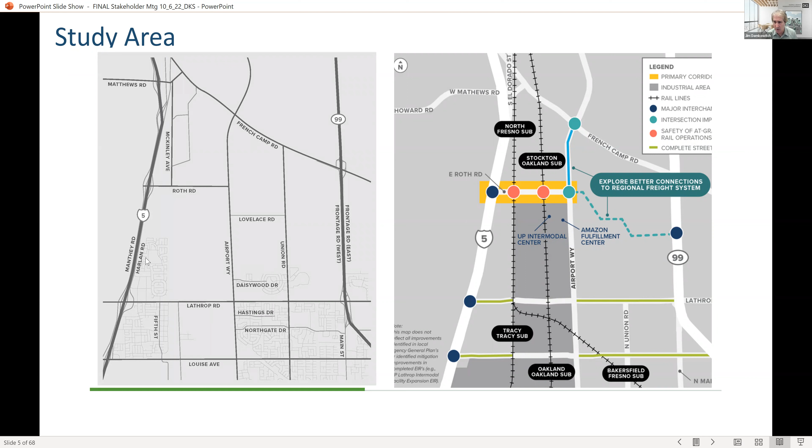That's been the big issue. And there's two at-grade rail crossings on Roth Road. That's these two red dots over here. So even though it's a somewhat simple network, it's got some challenges.

And just real quick, we did do data collection for this effort. But I do want to call out the county and the city of Lathrop and the city of Manteca. They have also been doing a lot of traffic counts, and they were happy to provide their data to us to defray the cost of us having to do new data collection.

And you can see here, and Sean will later talk about the study area intersections, but there was quite a lot of good data collected for this study.

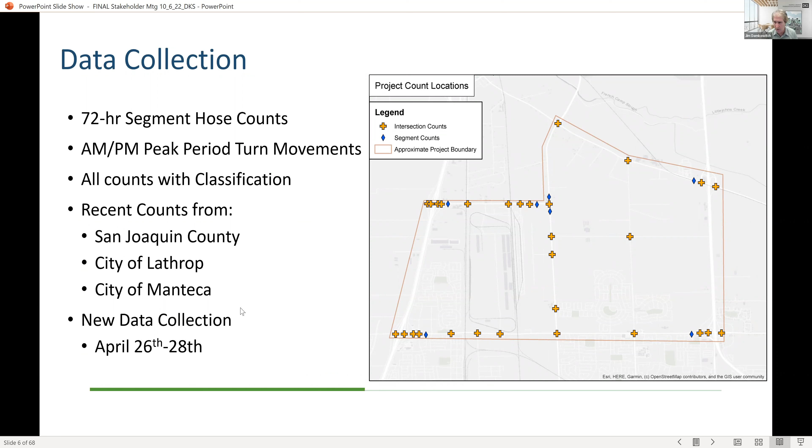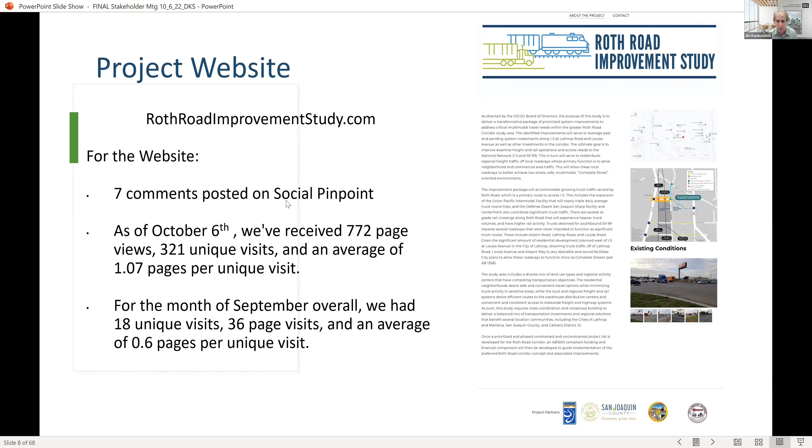So we're getting traffic. But the one thing that we didn't really get a lot of is comments on our social pinpoint site. You might be asking, if you don't know, what the heck is that? And you go onto our project website...

You'll see the social pinpoint interactive mapping tool. You can click that open and it kind of works like Google Earth. You can go to a precise geographic location and provide a geo-referenced comment. It's a great tool and it's still open.

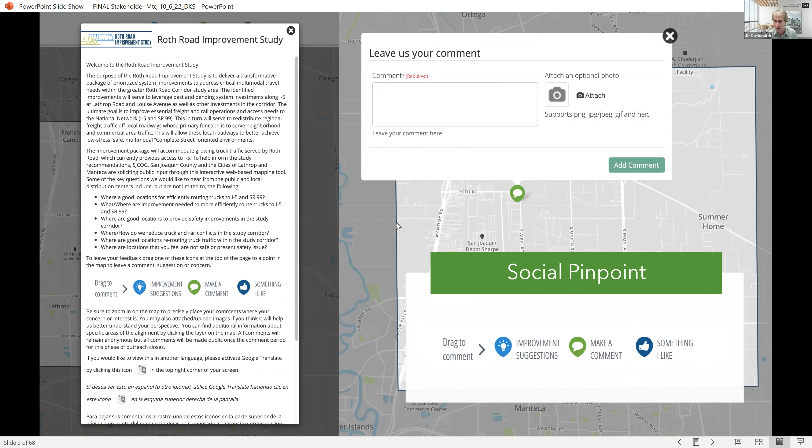So anyone can get on and provide input, whether they know a location where there's an issue or a problem, or they have an idea in mind for an improvement at a specific location. Feel free to go ahead and tell us what you think.

Okay, so obviously trucks are a big component of the traffic problem in the area. I'll have Garth of my staff discuss how we developed the truck volumes for this study. Garth, I'll pass it over to you. All right, thanks, Jim. Good afternoon, everybody.

As part of the truck trip generation, there were a few different pieces of data we used to develop that information. First, as Jim was talking about on a prior slide, we collected traffic counts that helped us gauge the classification of existing vehicles on the roadway. That was collected at a number of locations in the study area. For truck trip growth, we primarily focused on trucks that were three axle and larger.

A couple of key things we did: we reached out to stakeholders through a survey system and received data from them regarding existing traffic patterns today, their projected growth over the next 20 years, and information about seasonality of those trucks. From that information, we pulled together assumptions for background truck growth over the next 20 years. We accounted for a 25% seasonal increase in truck traffic against a typical month, and included a 50% growth over what was collected out there today.

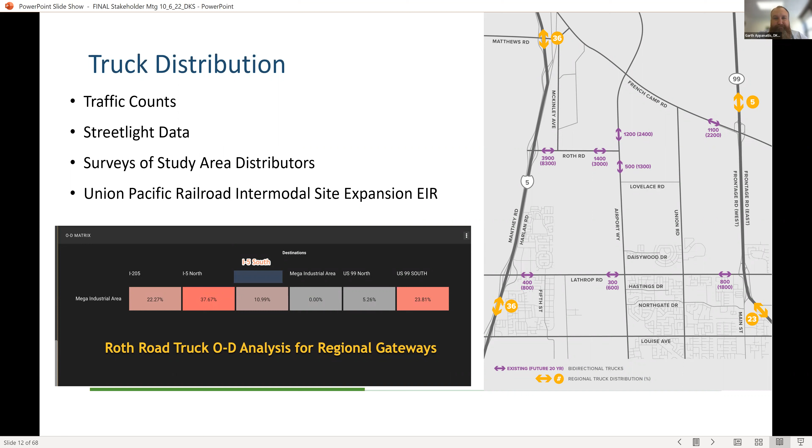One of the other pieces of information we used was origin destination data, so we were able to verify which ways those truck trips are distributing, whether they're going to and from 5 or 99, and then from the north or from the south. We used that information too when developing those volumes. Jim, back to you.

Thanks, Garth. Just so folks get a feel for this, we analyzed trucks separate from passenger vehicles because we wanted to accurately address truck growth, since trucks take up more space—their passenger car equivalent is about 2 to 2.5 cars. So it was very critical that we isolated and meticulously looked at that component of the traffic.

So we're going to talk about baseline operations, and I'll pass it over to Sean, who's our task lead on operations. There we go. Let's try that again. Can everyone hear me this time?

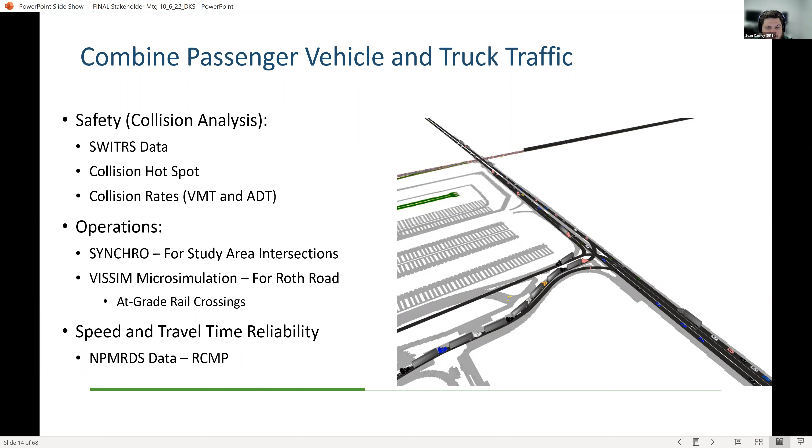We looked at a number of items in establishing our baseline for the corridor. First was reviewing safety data for the most recent 5 years available—given the lag time in aggregation of safety data, we looked at the 2015 to 2020 timeframe, prior to the COVID pandemic and changes in traffic patterns over the last 2 years. We looked at operations analyses, both with Synchro for our wide range intersection study area, as well as VISSIM for a micro simulation analysis of Roth Road itself, specifically the railroad crossing. Finally, we used NPMRDS data to review speed and travel time reliability across this region.

Starting off with the safety collision data: for the 5 years of collision data we reviewed, there were 354 collisions across this entire region, roughly 70 per year. There was no trend increasing or decreasing across the timeframe analyzed in regards to a safety trend one way or the other.

In terms of type of collision, this is very consistent with statewide averages, where speeding and improper turning movements are the number one and number two collision factors in this more rural region that classifies the majority of this study area.

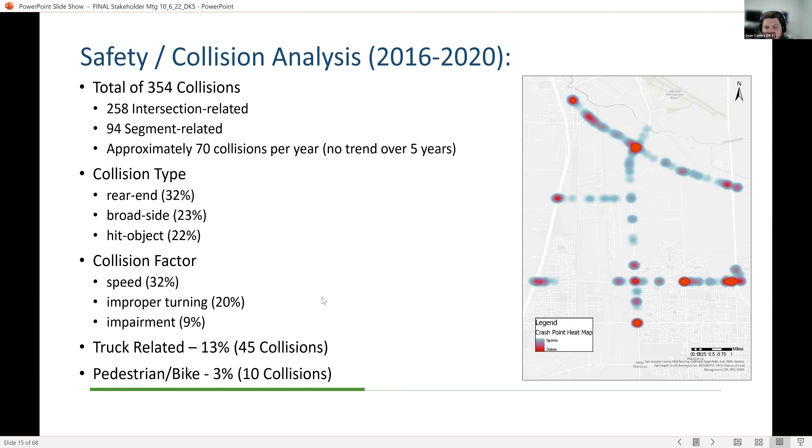Looking more specifically, around 13% of the collisions across the study area involved trucks, and around 3% involved ped bike, primarily those collisions occurring on Lathrop Road, which is part of what's driving analysis work.

As you saw on the previous slide, we have the overall heat map, and then the center map here is our intersection-based collisions and frequency on individual intersections. So again, we see here that Lathrop and Airport and French Camp and Airport stand out within our safety data. And then similarly, the segment collisions show that Airport and Lathrop Road are standing out as a higher collision trend than the rest of the region.

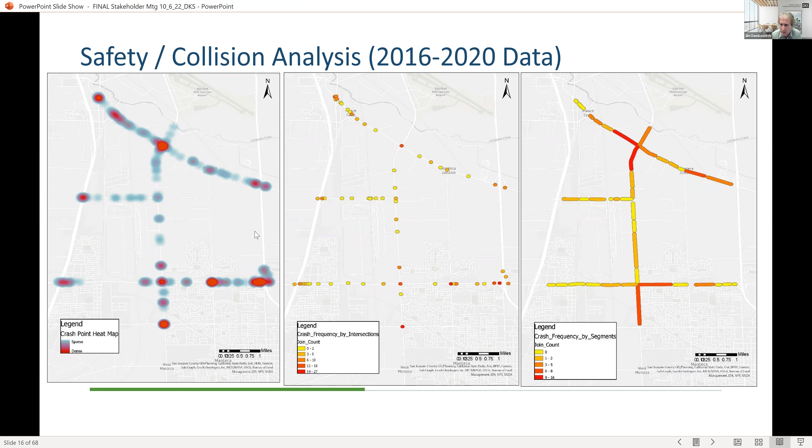I'll just point out the intersections. It's anything that happens within 200 feet of the intersection, and also driveways are included in this analysis. Yes, thank you, Jim. So intersection just means that it occurred within the influence area of the intersection.

These next 3 slides we'll go through fairly quickly, but this is just summarizing the traffic count data that we have at our 28 study intersections. This will be available in the final project report, as well as available upon request, since I know this is too small to read on these slides.

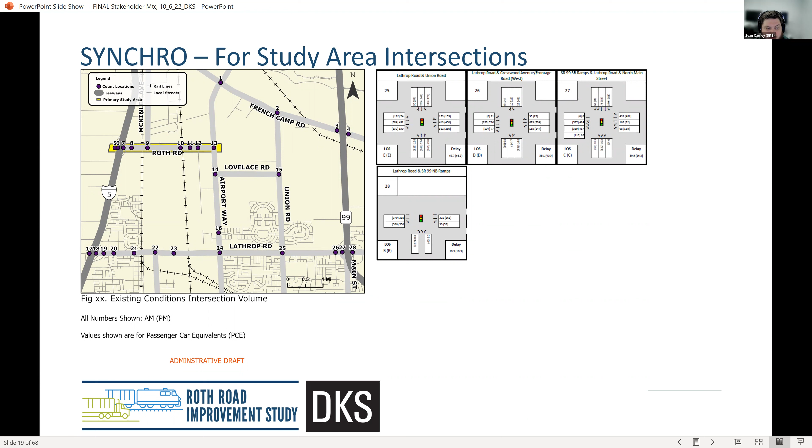This is just showing the locations that we are studying as part of this wider range analysis area.

Thank you, Jim. So this is more of a high-level summary of what our analysis is finding. Keep in mind that this analysis done in Synchro does not account for feedback between intersections.

As an example, if we look at Harlan and Roth, that stands out as having a higher level of delay. Those queues from that intersection do spill back into the interchange. So even though the interchange is showing as A through C, we are aware that that's not typical operation for you guys out there experiencing it in the field. But this gives us an idea about where those problems are occurring out there existing.

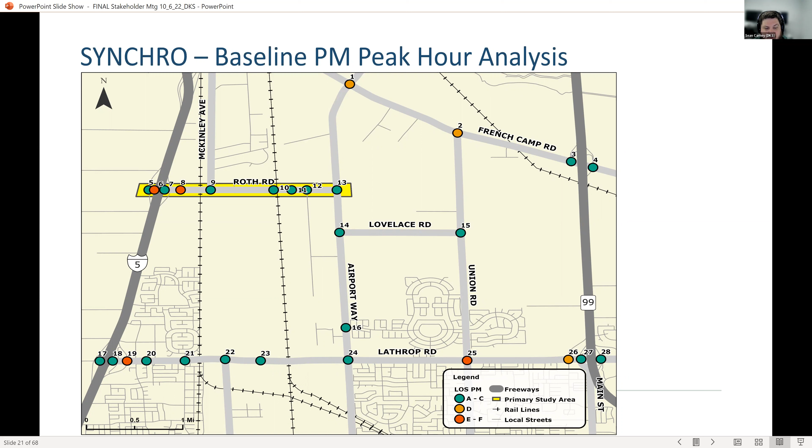So the previous slide showed the AM peak hour. This slide shows our PM peak hour results. Again, we see up at Roth Road and the interchange, as well as along Lathrop Road, there's a number of locations where delay is increasing. Similarly, up at French Camp, we have a few that are getting into the LOS D range, so a moderate level of congestion.

So that all being said, the next level of our analysis was to look at this in a micro simulation model in VISSIM for Roth Road itself. Jim, you can go to the next slide.

So there's a lot of data that makes up this particular image that you're seeing here. We're going to be showing 4 sets for each of these scenarios. This first one being a rail crossing event at the eastern track spur that crosses Roth Road.

The way to read these is that dark green means vehicle travel is going roughly at the speed limit, where you want to be traveling. Then it goes through yellow, orange, and ultimately red, that is relative speed decreasing compared to the desired speed of the driver. Think about this somewhat as what you'd see from Google Maps when reading it, with red being a high level of traffic congestion.

So again, we see here that the Roth Road interchange has a high level of traffic congestion during the PM peak period. That's being designed and dealt with through other projects not related to this study, so that will be different in our future baseline analysis. This is just looking at existing conditions.

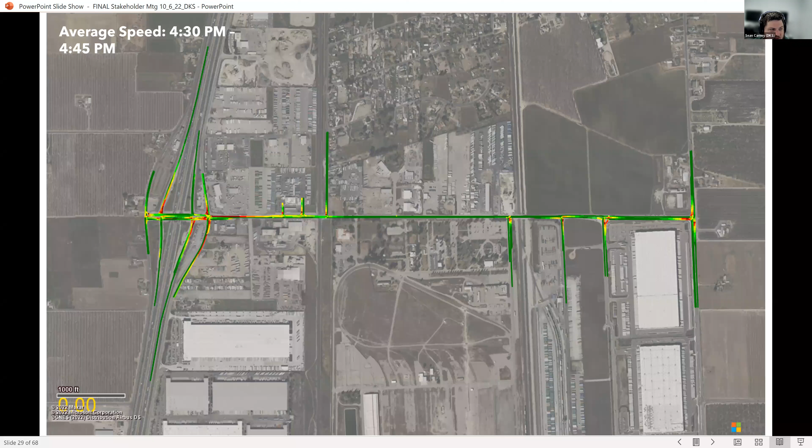Yeah, I did. So the first, second. Go one more, two more.

Okay, so here's where we have our western track event occurring. You see that in this case, it causes significantly more congestion, especially into the interchange, compared to what we saw with the eastern track event. That has to do with it being closer to the interchange, and these queues going back to that Harlan Road intersection, which then starts to interact with the other congestion points and bottlenecks we see across this system, making it much more difficult for the system to recover from one of these western rail track events.

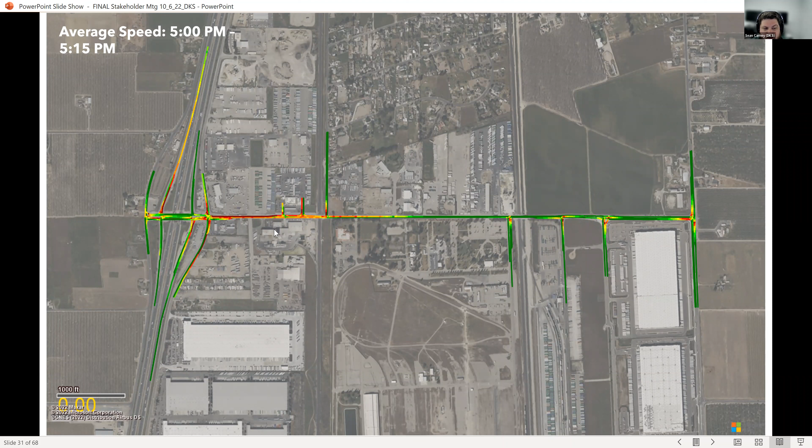The queuing extends for approximately 1,200 feet in either direction at its peak related to the rail crossing. If we move to the next slide, you see that once that event has finished, it actually worsens congestion through here as that traffic is released to the rest of the system and attempts to navigate through this higher volume section of the corridor, where there are more driveways entering and exiting Roth Road itself.

So our next batch of slides is what happens—this is theoretical—if we have events at both tracks separated by approximately 15 minutes of time. And again, we're looking at these knowing there's going to be increased rail traffic and increased truck traffic along Roth Road in the future based on growth of the various businesses out here.

So again, we see the eastern track event happens first, similar queuing to what we saw with the previous eastern event only, where that queuing starts to block off the driveways at Sharpe Depot, Union Pacific, and starting to get back towards those distribution centers out to the east at the corner of Roth and Airport.

If we move to the next slide, the eastern train has cleared, and now the western track event is occurring. And again, we see that the eastern track event queues have not fully cleared, and they're now hitting the back of the queue forming from this western track event, resulting in queuing that we see across this entire Roth Road.

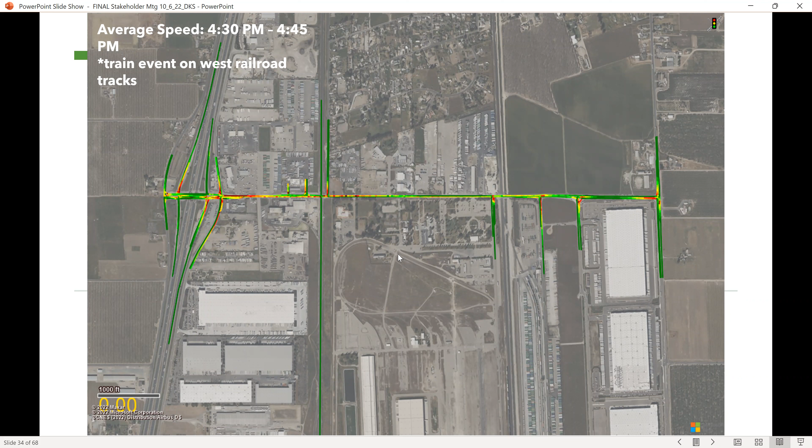So we see that significant queuing begins to develop, and then once that western track event clears, all of the traffic that has been held up between those two rail crossing events hits the interchange all at once, which results in significant slowdown on Roth Road all the way back to approximately the Sharpe Depot, which is what's instigating the need for some of these alternatives that Aaron will go into more detail.

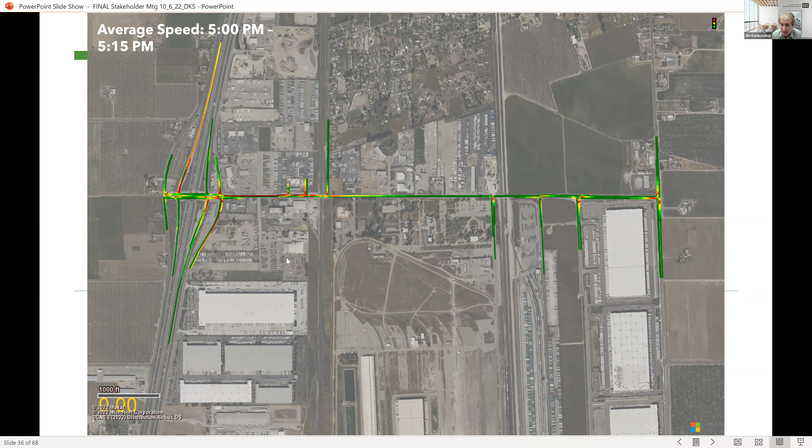Yeah, thanks, Sean. And I'll just point out, all these simulations were done based on existing traffic volumes. So this is under existing conditions. When we analyze the future volumes, it's going to be much worse than what we're seeing under existing conditions. So let's keep that in mind.

Okay, I'll pass it over to Aaron from Mark Thomas to talk about the improvement concept renderings. And I will emphasize that anytime you draw a line on a map, people think this is something real. Keep in mind, these are just concepts, and they're not designed. The need for these concepts is to generate fairly accurate planning-level cost estimates for the improvements, and to give folks an idea of what the concepts could look like if implemented. So I'll pass over to Aaron.

Thanks, Jim. So I'm going to walk through a few of the measures that we're looking at. The first two are extensions of Roth Road to the east. So Roth Road currently ends at Airport Way.

Another option would be to look at connecting Roth Road to the north to French Camp. There's a lot of flexibility with an alignment that would continue north.

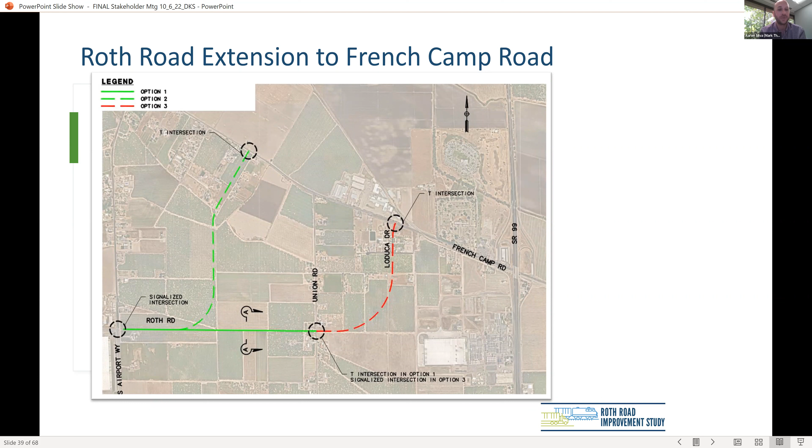The other two locations were grade separations, providing access of Roth Road up and over the railroad and eliminating that conflict with the railroad. This is looking at the westerly grade separation over the Fresno subdivision.

Harlan Road is planned to be realigned to achieve better intersection spacing from the interchange ramps and northbound ramps at I-5. That is approximately where the profile to go up and over the railroad would begin.

It would be carried over to the east and touch down near Vallejo Court. We show reconnecting McKinley Avenue underneath the grade separation through the Army Depot and then back up to an intersection adjacent to that cul-de-sac.

Our understanding is that the Sharpe Depot has potential for redevelopment, and so we were trying to utilize some of that space for reconnecting the local road network.

And then at the travel center, the Flying J, the profile of Roth Road would reach a point where access couldn't be provided directly off Roth Road. So we show a potential connection to the travel center off of the realigned Harlan Road.

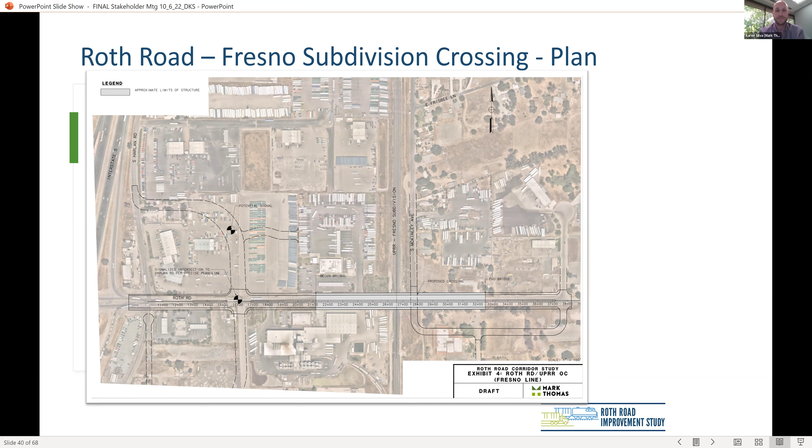Okay, I think the next slide just shows a profile.

Thank you. Okay. All right, carry on. All right, I think we accidentally changed slides through that process.

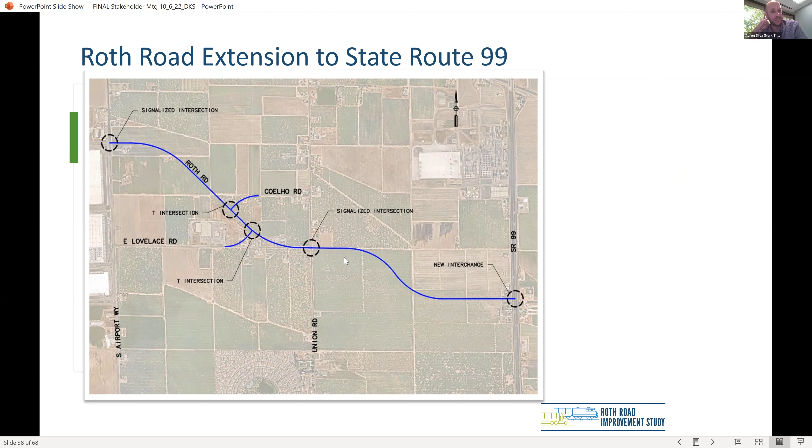So we have a minimum vertical clearance that we have to maintain over the tracks, and that's what dictates our touchdown points on either side of the Fresno subdivision.

We span over the UP right of way, and we would normally transition to embankment or dirt and transition to just roadway. However, because of the constrained right of way along Roth Road, we were looking at carrying the structure a little bit longer and then transitioning to wall to minimize right of way impact.

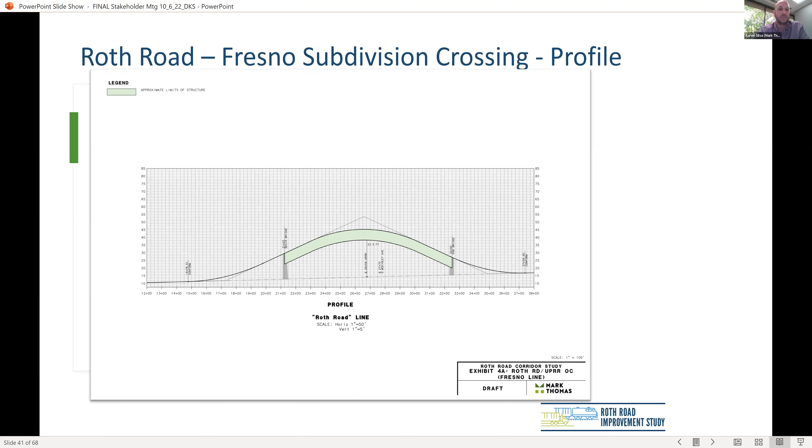Okay, and so the last location was the easterly grade separation over the Oakland subdivision, very similar to the one I just discussed.

On the west side, we showed reestablishing frontage roads, again because our profile of the roadway off Roth Road will be high, and we want to provide a frontage road to maintain access to those properties to both north and south.

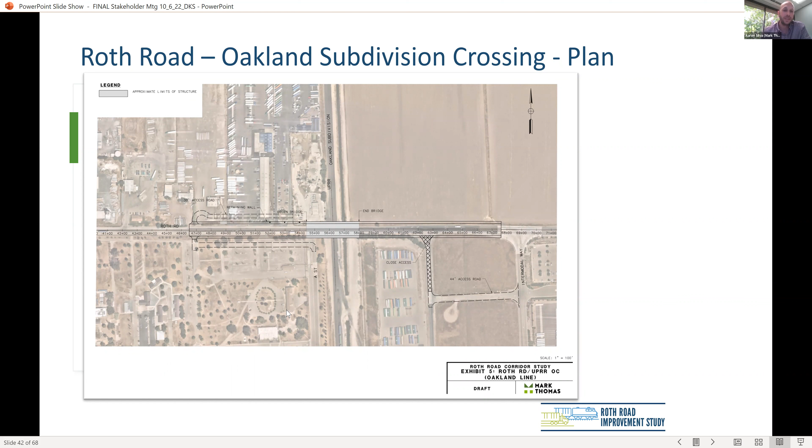The UP driveway that heads directly into their yard is approximately 8 feet lower based on our initial look. So we showed closing off access there and reestablishing access via International. However, it could be designed so that the UP driveway is maintained, with some more improvements to that access point to reestablish it. And lastly, the profile is dictated by minimum design standards to get up and over the railroad as efficiently as possible.

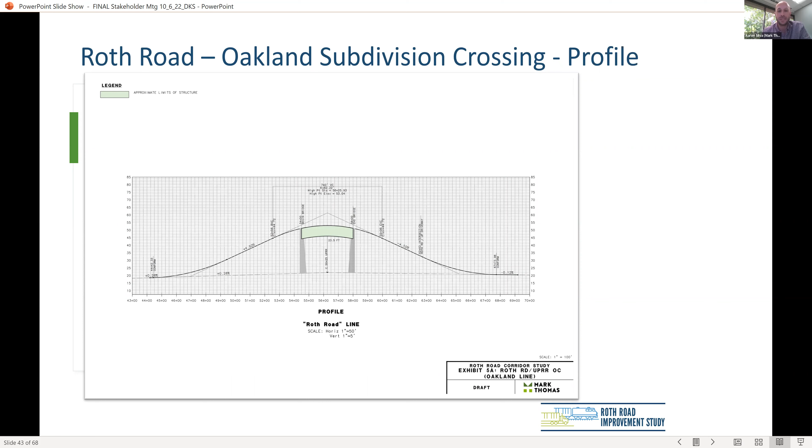Thanks, Aaron. Keep in mind, as we complete the forecast of our intersection analysis, there will likely be a need for spot improvements at several intersections, channelization improvements, and so on. Also, there are plans to widen Roth Road to 4 lanes, and we're looking at the possibility of widening it to 6 lanes. So we'll be taking a look at a number of options on Roth Road itself, and then intersection spot improvements for those intersections with deficient movements as a result of future traffic.

So I want to talk a little bit about travel forecasts. A lot of the work we've shown thus far has been based on existing counts. For the travel demand modeling and forecasting of future growth, it was driven by land use from San Joaquin County's general plan update, the city of Lathrop's general plan, and the city of Manteca's draft general plan update.

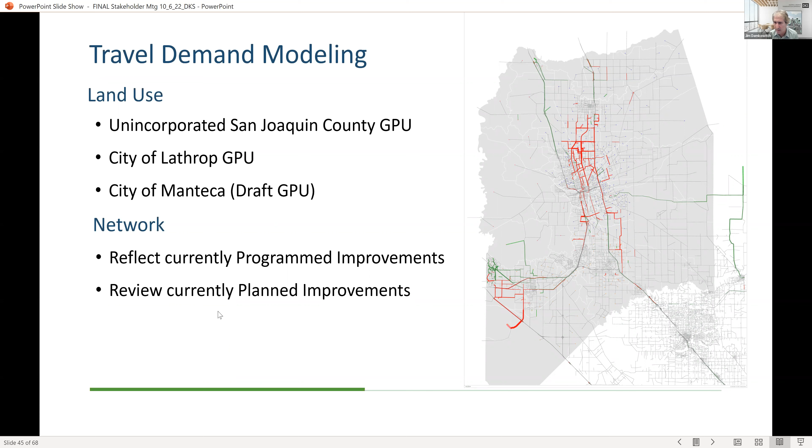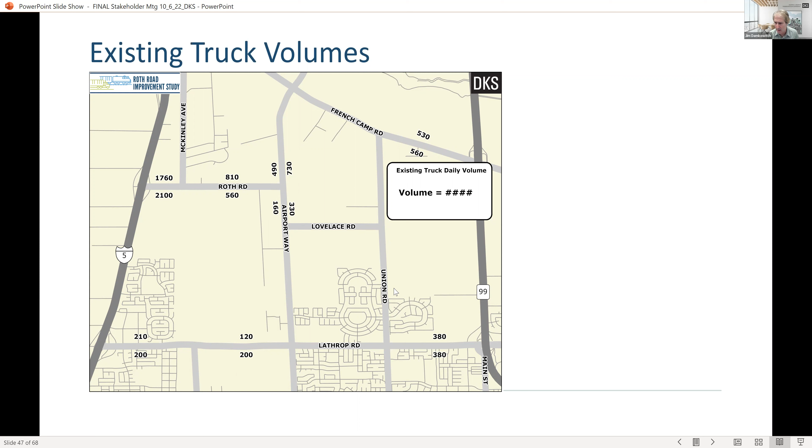So real quick, as Garth has already mentioned, this is our existing truck volumes based on the counts. Take a quick look, and as Garth explained, truck volumes specifically are anticipated to grow in the study area, and that's what these look like. Looking at this segment on Lathrop Road, roughly 760 trucks is projected to grow to about 1,800. So a lot of these locations more than double in truck volumes.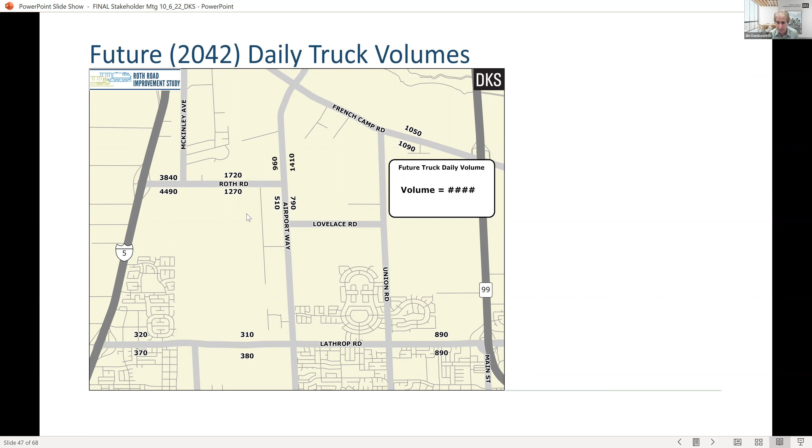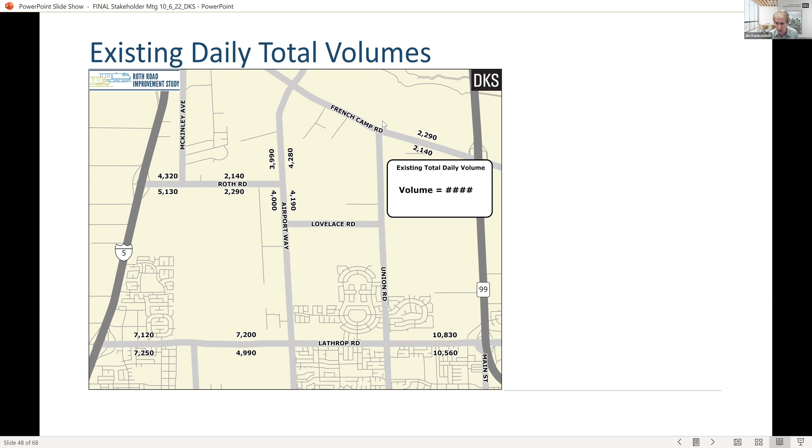Moving on, there's the total volume - that's the trucks I just talked about, plus all the passenger vehicles. This is under existing conditions. In 2042, a 20-year projection, you can lock in on any one of these locations if you're interested to see how it changes. And here's the future - depending on location, everything is roughly doubling, and if not more.

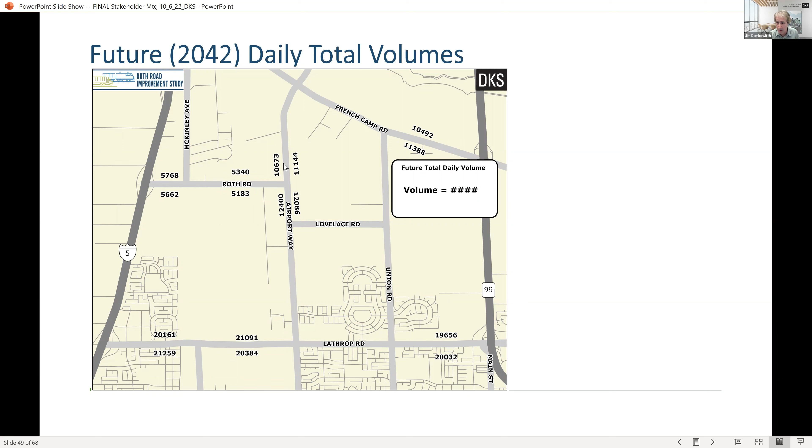That's the projection. You're probably wondering, well, we talked about those extensions of Roth Road - how is that going to change circulation? Sean and I flipped a coin to see who gets to talk about this, and he won. So I'm going to let Sean talk about it. I'll preface first with explaining what it is that we're showing on the screen here.

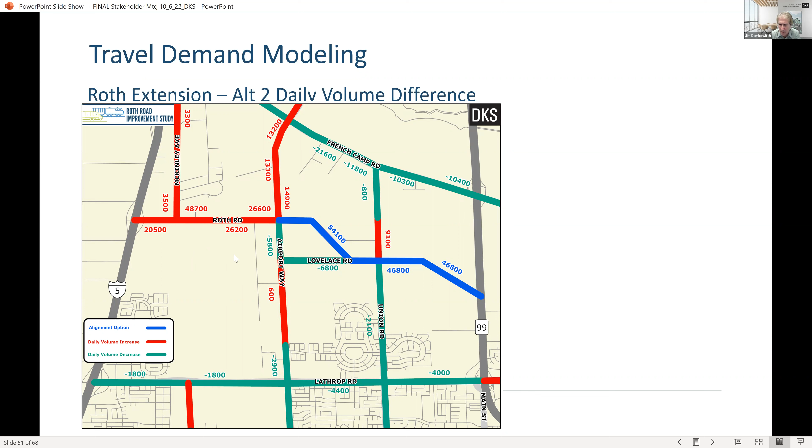Yeah, and obviously with any extension, it puts more emphasis and more traffic on Roth Road, hence the need to widen Roth to 4 lanes minimum, and perhaps even 6. But based on these volumes, well, these are the deltas, but we would take a look at that to see what needs to be accommodated.

So the one thing we didn't show you is the future operations at the intersections. That information is still being processed and QA/QC'd, but it will be available soon, and we'll be happy to share that information as well.

In terms of the big next step, that's what's called the Nexus and Fair Share Assessment. What does that mean? This gets to the role urban economics will have for the study. So after we get a complete listing of the capital improvement projects proposed to accommodate the future demand...

That could be 1 or 2 of the crossings, that could be either of the alternatives for the Roth Road extension, either the French Camp connection or a new interchange at 99, which is more expensive. I know the city of Manteca is far more favorable to the French Camp connection. It is cheaper and just as effective, or equally as effective, as the southwesterly or southeasterly extension with the new interchange at 99.

Last is just the performance metrics. This relates to the need to be competitive in state and federal grant programs, and all those grant programs are very performance-based. There's a number of measures of effectiveness that typically equate to a benefit-cost assessment, so you need to quantify the benefits to society and factor in the cost for the improvements. Typically projects that have a very good B over C, meaning they basically pay for themselves in a very quick amount of time, get selected for state or federal funding.

So that's something that will be the last step we do after we've developed our analysis. And with that, that'll conclude the presentation. We have about 12 minutes for Q&A.

I do want to point out that if you're interested in learning more about the study, Ryan Niblock is the project manager for the San Joaquin Council of Governments. I'm project manager for the consulting team, but we also have for DKS an outreach manager, and that's Kendall Flint, and this is her information.

So with that, I'm happy to open it up for questions. We have a couple chats.